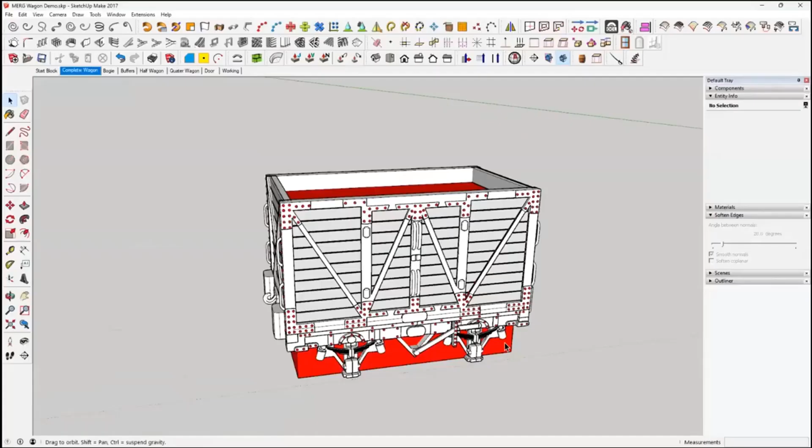Well, we'll start today. I was going to do this top bit, not the bogie or the underframe. That's easy enough done, it'll just take another meeting or something to get that done. But we'll just do the top bit.

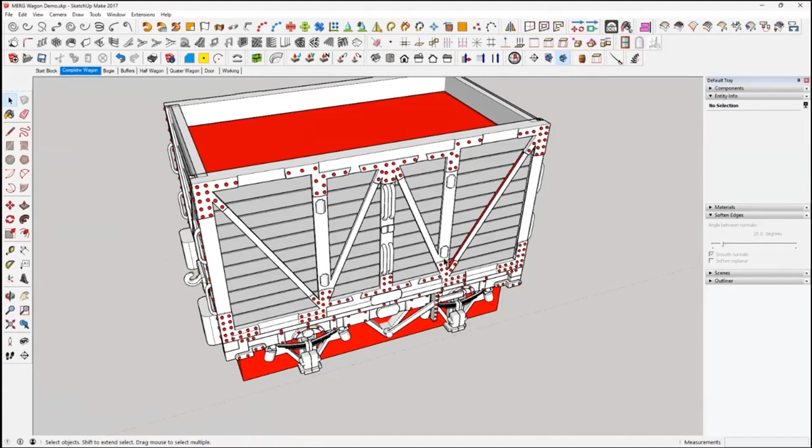So it will be 4 panels, side and back. You've got your 4 corners and 2 doors. We'll do the doors separate, or you can print them in place, or have them opening, so give a bit of option there. That's for another time, but we can make something like that. Easy enough. Buffers, half a wagon.

Right, we'll do this bit to start with. What we need, I'll put this here as a rough guide. It has been pulled and pushed around, so the dimensions are not great. Now, I am working in meters, so 1 meter equals 1 millimeter, no ifs, buts or anything. 20 meters equals 20 millimeters.

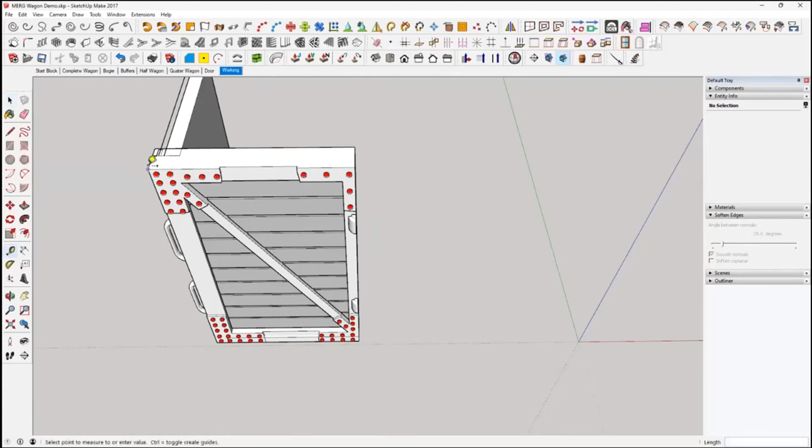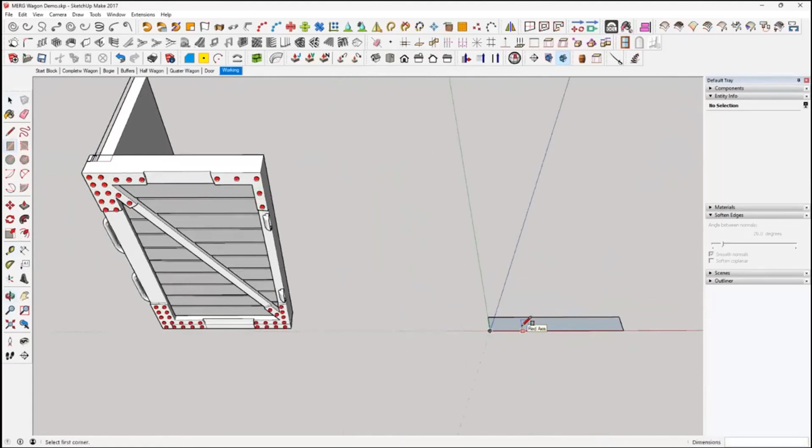Right, this one, we'll give it 2 millimeters wide, we won't even say 2 by 16. First thing we want to do, draw a square, and we want it 16 wide, 16, 2, enter, and that'll be the equivalent to this top bit here. We'll right click and reverse that face so the front face is facing out, then we'll push pull up to there that says 25.56, so we'll give it 25, enter. So that's the start of our outside wall.

I will set up a couple of grid lines here. I want to know how wide that is, that's about 2 mil from the left edge in, so 2. Top bits, that's about 1.5. I think let's give it the same on the bottom, 1.5, and that's 1.

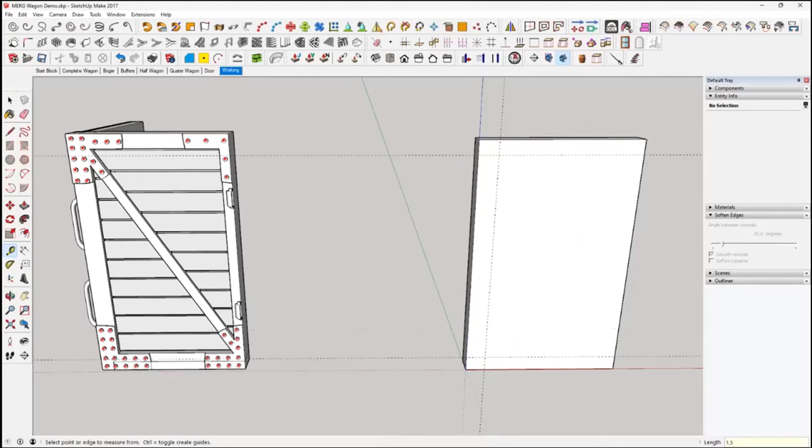So we'll come down on the blue axis. If it's not going on the blue axis, like there on the green, just press the up arrow. We'll come down 1.5 mil, same at the bottom. We'll bring it out on the blue as 1.5, then come in from this edge as 1 mil, 1, enter, and that's the sort of square we want to take out the middle.

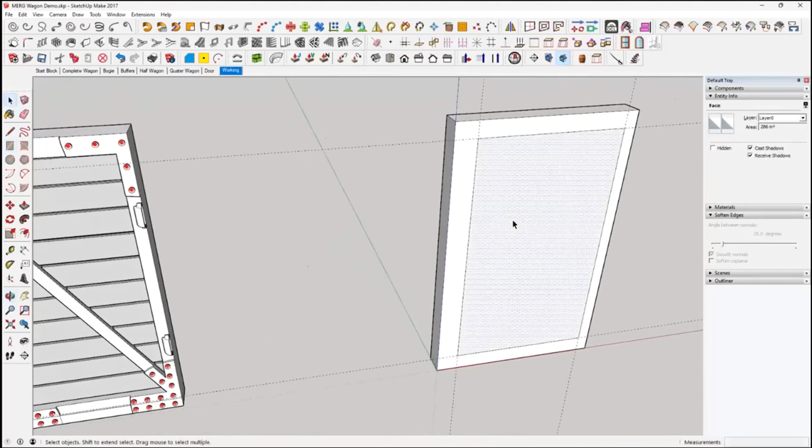So first thing we do, we'll draw a square that matches up with that. So we've got the thickness of the wall, and we've got a square to put a wood paneling in. We click on the wood, the square in the middle, and we'll push it back. Now, I know for a fact my wood paneling is 0.4 thick.

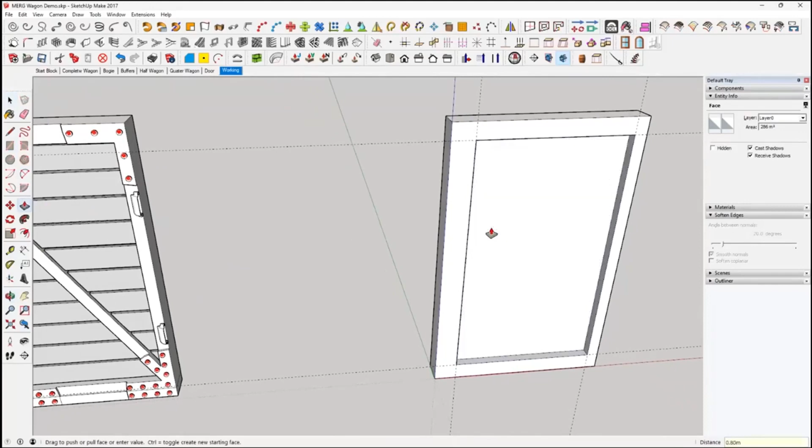So if we go back 0.8, we'll push this back 0.8. So we'll have our wood paneling on the top and a bit of a gap, a bit of a frame around it.

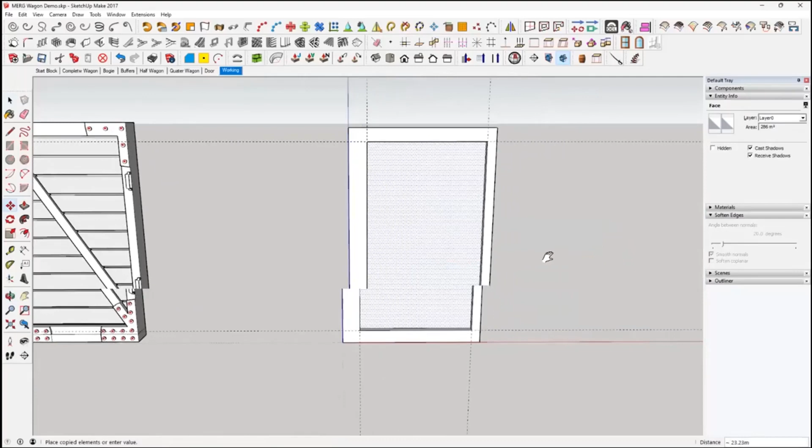One thing to do, we click on that front face and we'll do a control move along the red axis just to duplicate it for our wood paneling. So triple click on this square, right click, and we'll make this a group. So we've got the layout basically for the start there.

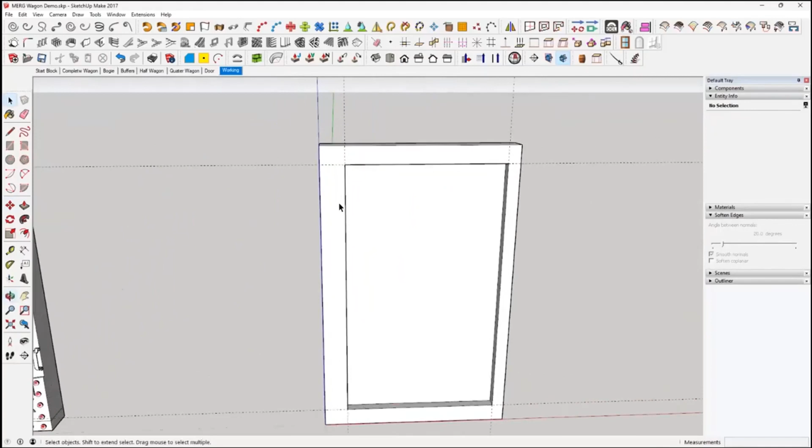While we've got these guidelines, we'll draw that bar going across the middle. So put up some more guidelines. How wide's that? About 1 mil, isn't it? It's about 1 mil wide. So we come on the top one and we'll move it across as 0.5, same again, down 0.5.

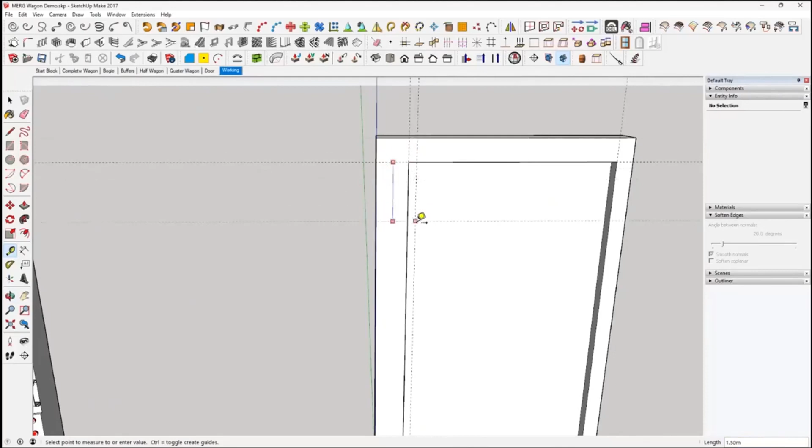Oh, see, I thought it was on the blue axis, looks like it, but it was on the green. So always make sure you're on the blue. Coming down 0.5, and same again, 0.5 on the bottom, along the red, 0.5. So just setting up a little guide.

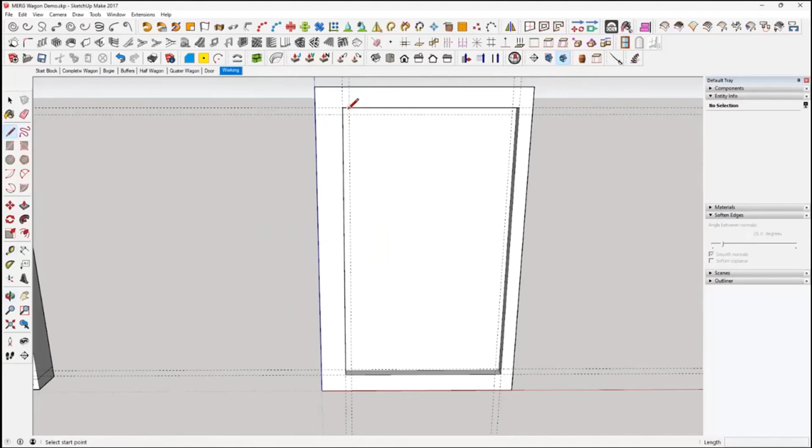So we get our pencil tool, we'll come top edge, down to that guide, along, up, just draw, there we go, just draw the bar in using the guides, draw it in freehand. Click on reverse the face.

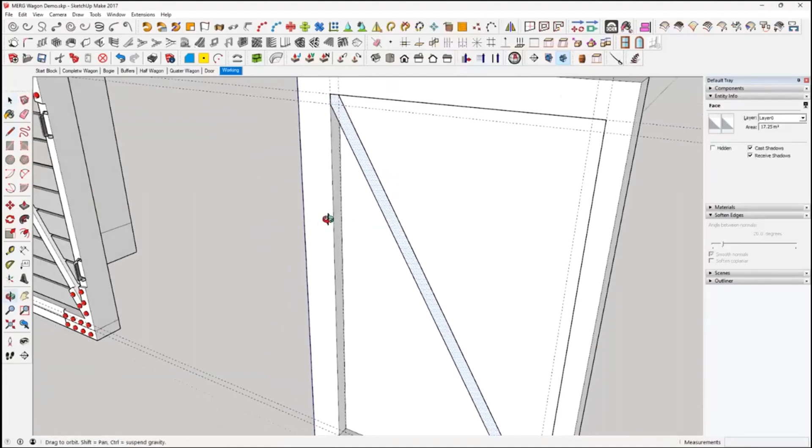Yep, good. What we can do now is extrude that. So push pull tool, and we'll push that back till it reaches the back wall and it's on the face there. So basic shape of that.

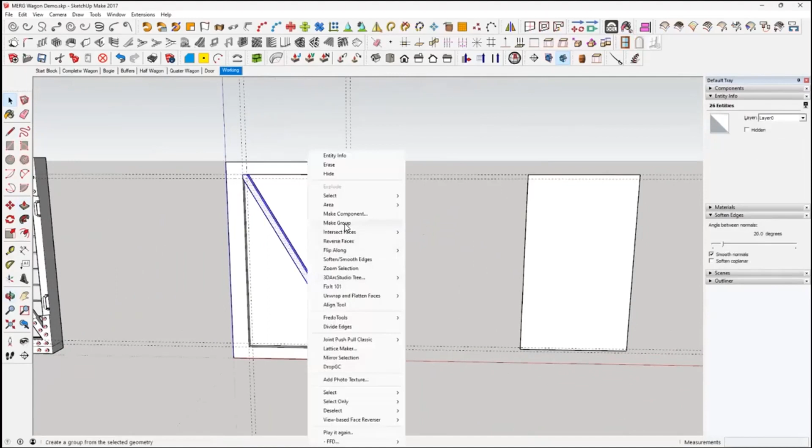We triple click that bar, right click, and we'll make that a group. And if we click the back and click the bar, we do a right click and make a group. So then two are now in a group.

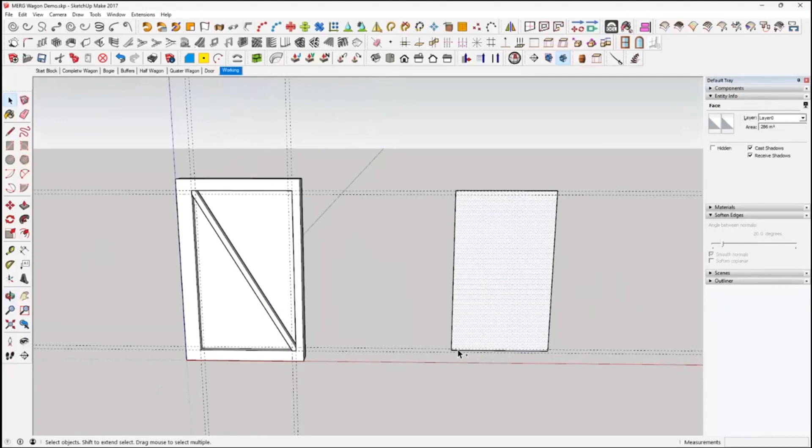Now what we can do is put the wood cladding on. So we use the piece we used, move it over to the right, click on the bottom edge. We've got a few guidelines here. Click on the bottom edge, and we go to OOB, and I have got a preset for this, and it's my wood cladding.

And yeah, so we want it going across like this. Now, the settings I've got here, disregard the top. The planks are 1.3 mil high. The thickness is 0.4. The space, which is between, is 0.3. The H, that's another 0.3. So the gap between the joints, planks and between the joints, is all 0.3. Joint depth, leave that at 0 because we don't need that.

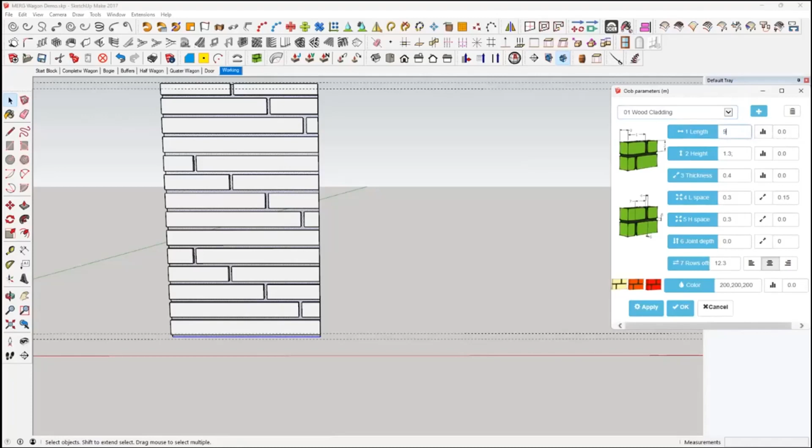And the row offset doesn't matter about that one. The main one is the length. Now we don't want all these joins in there, so the length is at 14.9, so it's 15 mil. If we highlight the whole lot and put 999 and enter, what it does is falls it into being a great big long length and you don't get any joins. So we press OK.

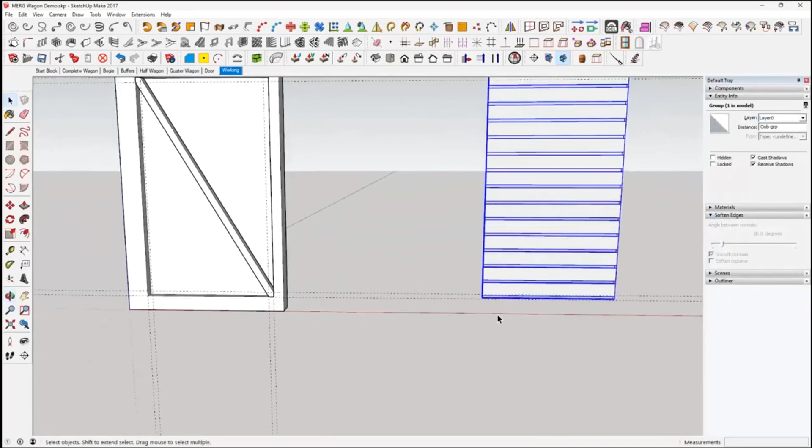And then we'll click on, and then we'll put this on our frame there. So what we do is we'll find an edge, so we've got whatever object we want. We'll click on, press the up arrow, so it's going up in the air. Find exactly where you want that spot to go. In the corner, up arrow, click on, and we're there.

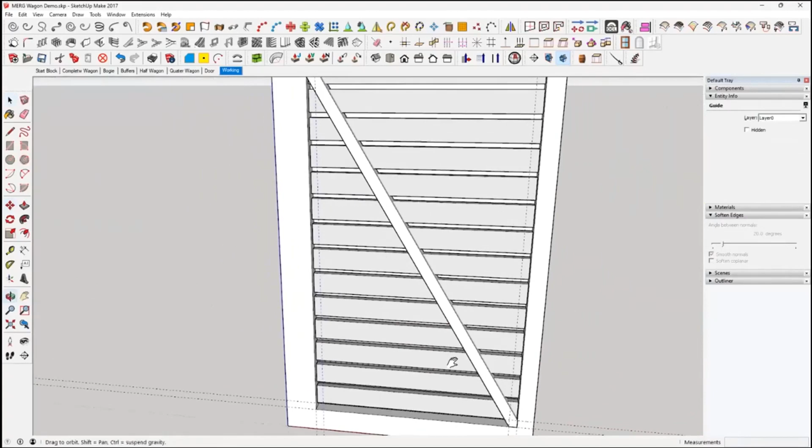So, well, we've got that. So we've got the back frame and the sidebar. If we click on the wood, and it is a group, if we cut that, and we've got this group, so we double click this group to open it, and we'll do an edit, paste in place. So we now got all three groups inside one.

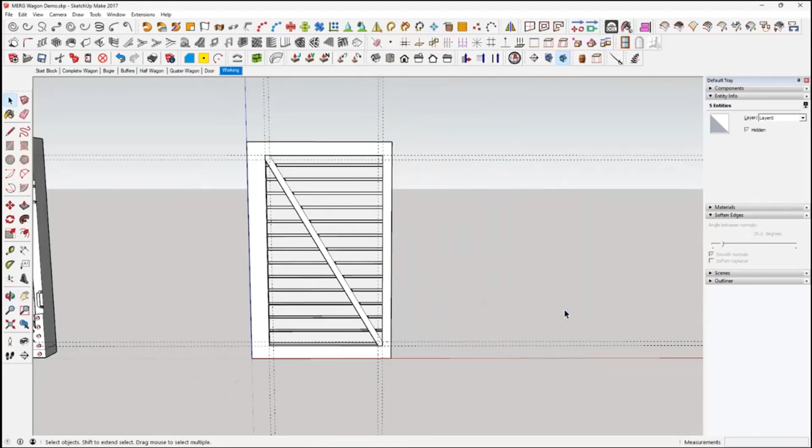Just a bit of housekeeping really. So if you right click on that and hide it, you notice the whole lot in there. So jobs are good on that. Triple click on this, you don't need it, it's geometry left over from OOB, and delete. So we're good to go on that.

We better save it, I suppose.